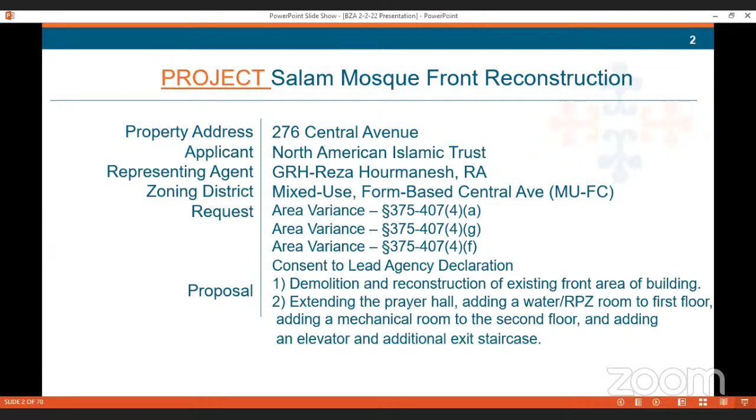This is background on the Masjid As-Salam. It was opened in 2000, serving the community in Albany. We had a renovation or rebuilding done for the backside, which faces Bradford Street — this building runs from Central Avenue all the way to Bradford Street. We reconstructed the back portion of this 276 Central Avenue building, constructed into it, put a new roof on it, and made it 2 floors.

We can have pictures. We can go along and show the pictures of what we have constructed in the end. So these are some of the services we do, community services.

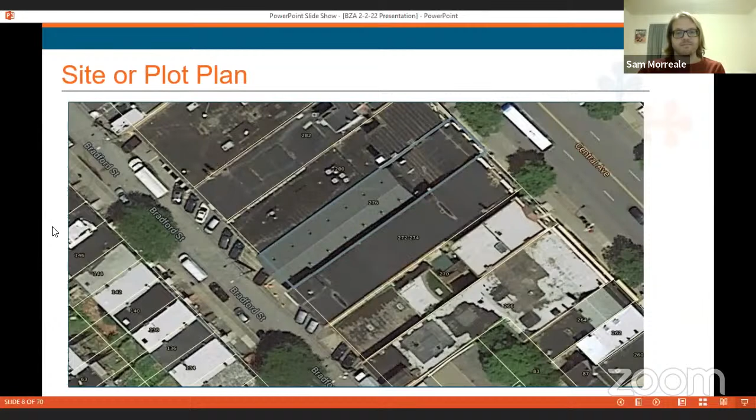Okay, Reza, do you have anything to add to the introduction? No, basically what I heard, it was all good. You said it as I would have.

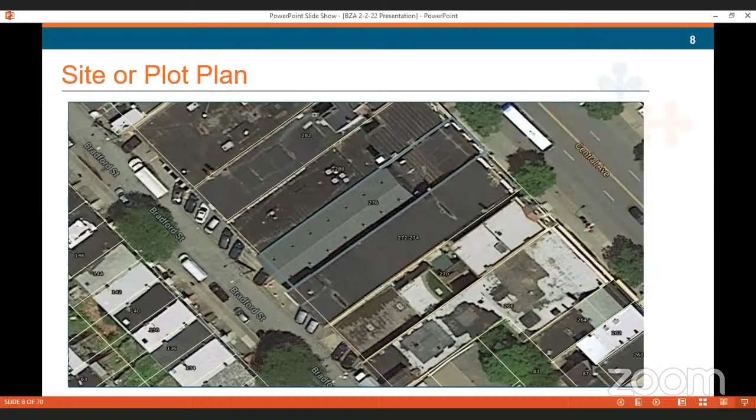Basically, the mosque, they provide services for local people, neighborhood, community, and in addition to that, the old building was pretty much structurally unstable. The floors were all over the place and everything that was not proper. The foundation was not proper.

So what happened that we did the drawing, which is actually 2/3 of the space. It was the back, which was phase 1, which is done. People use it, the community uses it. And now we are here for the front portion, and mainly the issue is with respect to the front elevation,

the fenestration for the front. The design is basically based on the concept, the portal of entry, as like in churches, basically there's a like Gothic church. I'm talking about more traditional bell tower, and this, what we propose is basically very standard for a portal for a mosque.

And also what we did, we tried to work with the planning department. We added windows, we changed the split face block to brick, to basically red brick, to match the church across the street. That's going to be that color of red brick. The tan brick, if you go the other way, you'll see some churches that have some tan stone and brick.

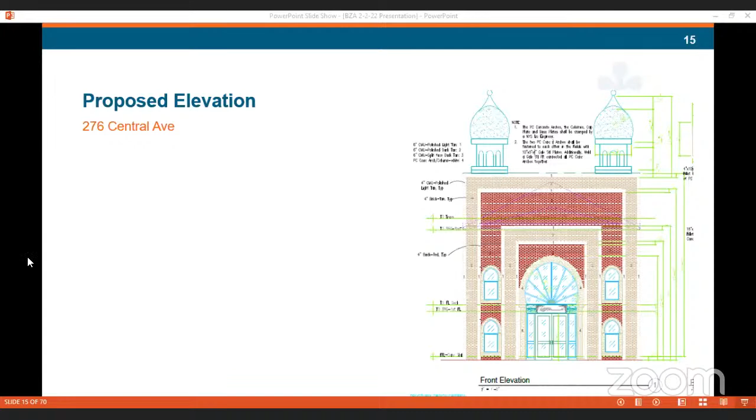So from the variances request point of view, we are trying to repurpose any materials that can be salvaged, and we are working with the Albany Historical Society to use the cornices.

We'll be donating windows, doors to Habitat ReStore. And similarly, alternatives were considered. The existing structure is not feasible to be used by the community.

We want to make sure that there was fire on the second floor where the timbers were burnt, a little bit charred, and we want to make sure that the building we are reconstructing is safe and sound for the community to use.

So if you move on to the next slides. So we're talking about the area substantiality of the variance request.

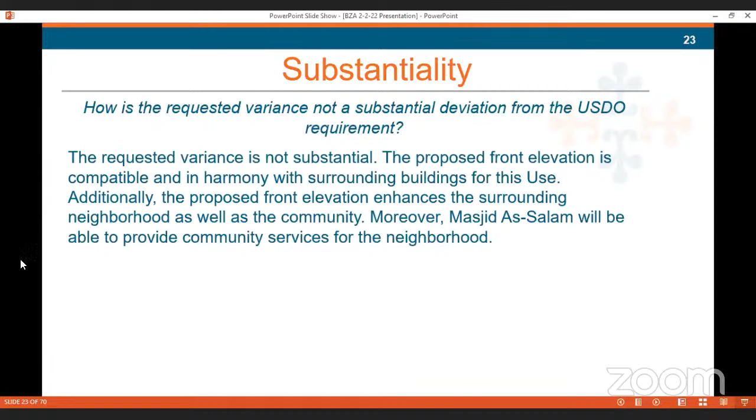So the other variance is for adverse impact, physical or environmental conditions in the neighborhood or district. The proposed reconstruction of Masjid As-Salam's front portion will not have any impact, considering this is already a storefront kind of building. It will not have any impact to the drainage of Central Avenue. This will all be scaffolded and built so there will be no dust or other impact to the surrounding communities. Reza, do you have anything to add?

No, basically we have provided a barrier at the front before they do any demolition. I think they have to get the permit from the city of Albany to work in the right of way, to put that barricade, which is going to go up almost 15 to 16 feet high, to prevent any debris from coming into the right of way, specifically the sidewalk.

That's another thing - that barricade would probably come into the sidewalk about 2 to 3 feet, because there's foundation below that we have to excavate and pour new concrete, and remove the deteriorated old foundation.

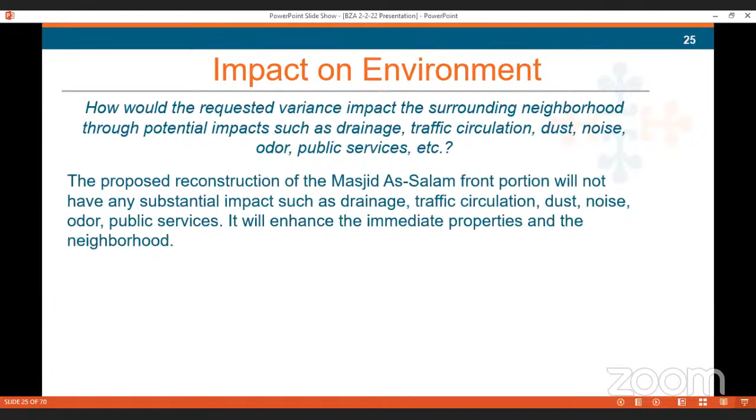So this reconstruction of the front of Masjid As-Salam is not self-created. The existing structure was not safe and adequate for the intended use of what we're trying to do and expand our services in Masjid As-Salam. The foundation is crumbling, and there has been a fire a long time back. We want to make sure it is safe for public use.

Anything to add, brother? Basically, the floor - when you walk on it, it's not even. That indicates there's some wood joist or beam deflecting more than it should. Mainly, when the wood gets 70, 80 years old, they lose their resin and then their elasticity. So the floors on the first and second floor are not even. On the second floor, there are like 1, 2, 3 levels, and I don't know how that happened - they kept building steps to go to the next level. So it's not even accessible for wheelchair access; accessibility is not good. We are providing a new elevator so people can access the second floor, and even the first floor will be fully accessible.

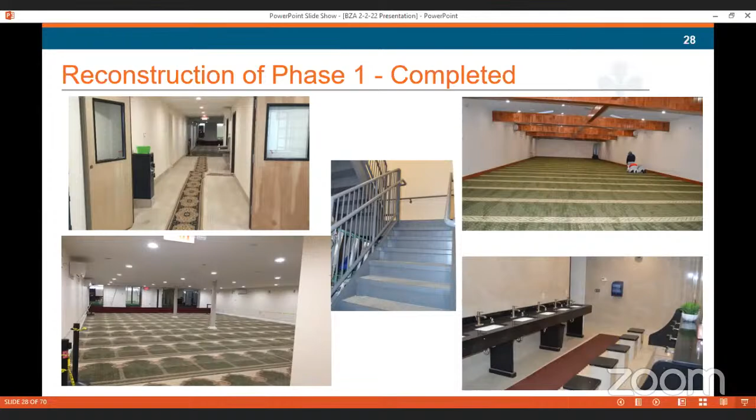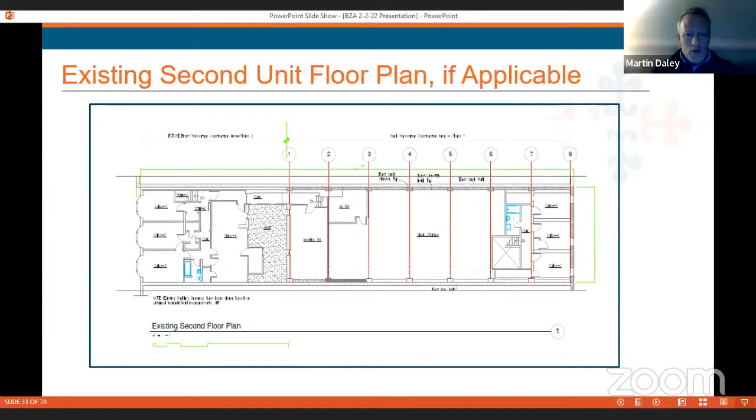Well, I thank you for your time this evening presenting your plan. Quite an ambitious project, so kudos on moving forward on it. I want to go back to our slide listing the variance criteria, because I want to make sure we are narrowing our focus to the areas where we're requesting the variances, which relate to the facade of the building. So thank you. Before I ask questions, I want to give my other board members an opportunity to jump in ahead of me in queue. Do any of my other board members have questions for our applicants?

How old is your current roof? The front, phase 2 or phase 1? Both. Phase 1 is brand new. It's basically a slope-roof gable roof, shingled with ice and water shield. We made sure we went a little bit beyond just putting felt on.

The front is rubber, a portion of it, and a portion is half lap, and it's not in good shape. If you go to the second floor, there's 3 places that are leaking. You can see on the ceiling they put a suspended ceiling to hide the old chipboard ceiling, and you can see some leakage due to discoloration of the ceiling tile.

And that was phase 1? No, phase 1 was basically we put a gable roof on top with a slope roof and shingles. Phase 1 is 2 years old. The phase 2 is the front, and some of it is rubber, some is half lap, and it's not in good shape. There's leakage - at least I've seen 3 places that leak on the second floor.

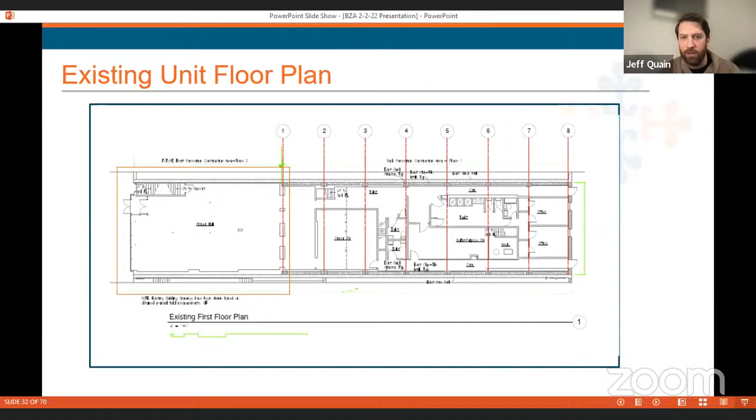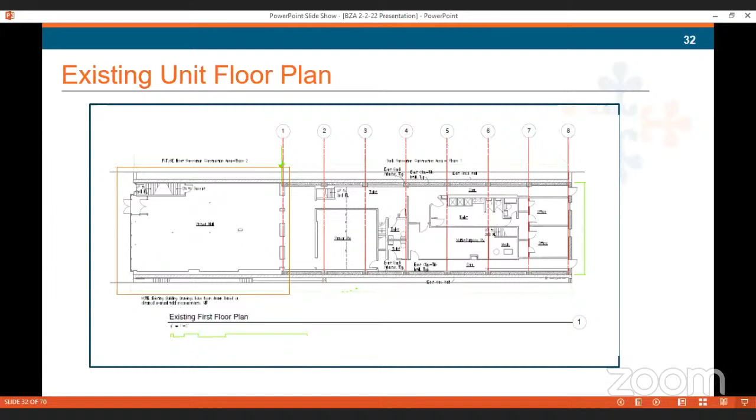It would be a little bit lower than the building to the right, which the mosque owns as well. But it would be lower than that. It would be almost like the adjacent building to the left, or the one that they own. Also there's another place that they own that they utilize for education, but it's about 31 feet something, if you go to the elevation it shows. Now I'm talking about the building itself, not the minarets. There is about maybe 31, 32 feet, if I recall correctly. And of course the roof is lower than the top of the wall, but it would be pretty much 2-story, though it tries to line up as much as possible with the adjacent building, other than the one to the right, which was pretty tall. Now if we would have gone that high, we'd have had to put another story, and we were just trying to keep it to two levels, 2-story.

Okay, thank you for clarifying. And since a couple of the variances we are considering have to do with the reuse of materials, I know you provided quite an extensive plan of how you will donate or reuse. Was there any consideration about reusing these materials in the new building, other than donating them?

To be honest, the new building, like the windows, is not even going to be compatible with what we have. Most of these windows that they have right now on the first floor are storefront and mostly single pane, clear aluminum. But to be honest, not really, because most of the stuff, like the wood we were talking about, if they chip the wood they can use it for gardening things like that, or the windows and things like that could be utilized in a different building. But I don't think it would be prudent to say that we can use some of it in this phase 2 for the new construction. Yeah, and they're single pane windows.

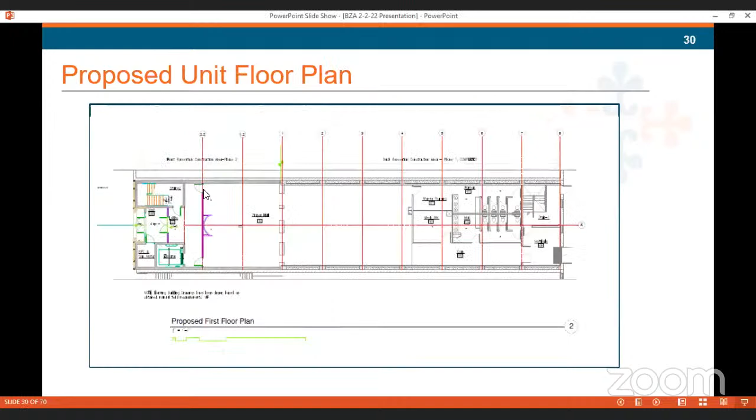So in document 375-407G, the addendum has the heights of the adjacent building, and let me give you the height of the proposed building in total. Thank you.

And that's the top of the minaret, by the way. Top of the building, I think it's about 32 feet from what I recall. Yes, it is 32 feet. The building height is 32 feet and the minaret is 14 feet, so in total it's 46 feet. The church across the street is about 76 feet. No, I'm sorry, it's 60 feet, okay.

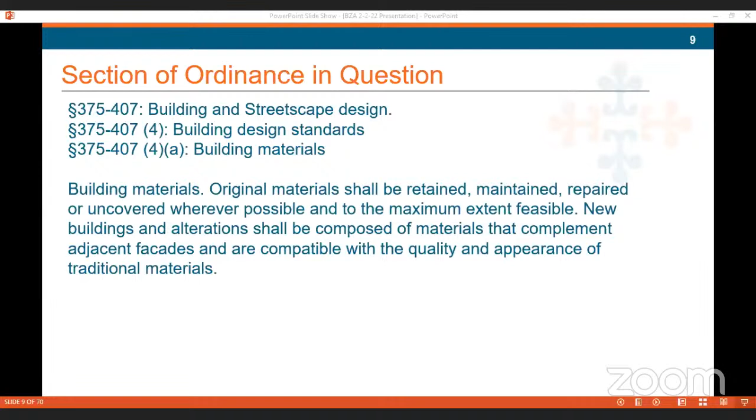Chalking, I call it, basically you can see. So reusing it is pretty different. I would be hesitant to use those because of the loads we have to calculate for the floors. Most probably that floor was not calculated for 100 pounds, which is an assembly space, plus 20 pound, 15 pound dead load, so 120 pounds live load. For an assembly like a mosque, a church, a place of worship, the timbers were not able to make them work with the load that the New York State Building Code requires for assembly space.

Okay, so those materials you're talking about wouldn't be seen in the facade anyway. They would need to be modified, but they wouldn't be visible anyway.

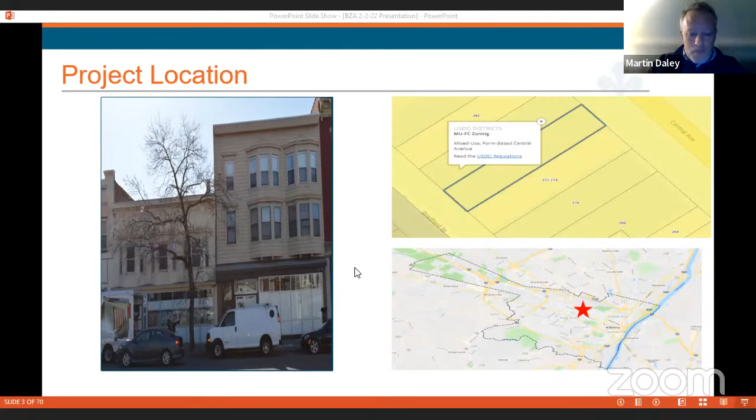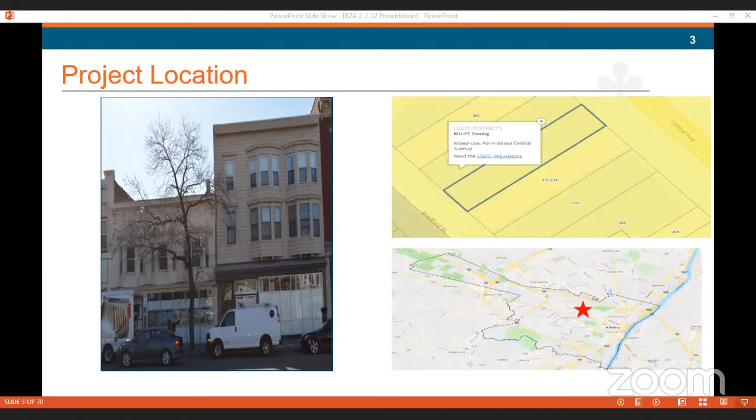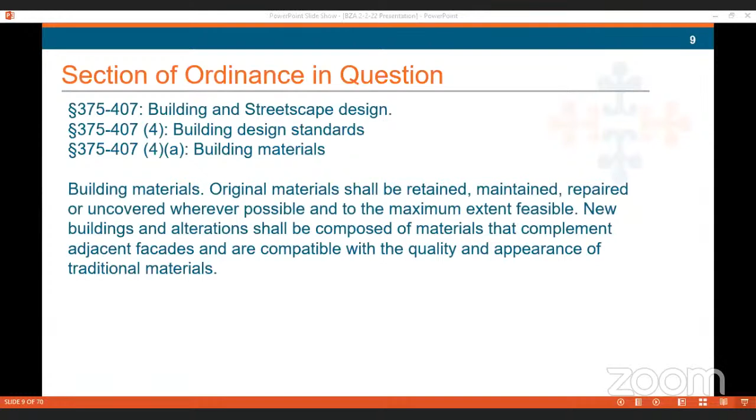Correct. The front of the building is actually brick, but it was painted way back, I don't know when. So we're going back with the same concept. First they had brick, then some community members asked for split face block, and finally we changed it to brick. My suggestion was that brick is more compatible with the other buildings around the area. We also wanted to utilize red brick to match the church, so it doesn't stand alone, and resembles the materials used around that area, left, right, and across the street.

One more question, then I'll go back to my colleagues if they have any additional. When we're talking about fenestration, we're talking about original window and door arrangements. This building seems to have been modified multiple times into various types of structures, most recently a storefront. Is it the applicant's contention that preserving the building as a storefront doesn't meet the needs of the current use of the structure?

Correct. If you look at the storefront, it was added. The original windows were set back, and they brought it out at least 3-4 feet. If you look at the adjacent building, you see that one is set back, so they were gaining more space. And of course those storefronts are painted white so they can get some privacy when they pray.

Basically, a lot of the stuff on the first floor, that storefront, was remodeled maybe 10 or 20 years ago, so none of that was going to be useful to us in terms of showing that this is a mosque. It resembles very much a storefront for a retail store rather than a religious building.

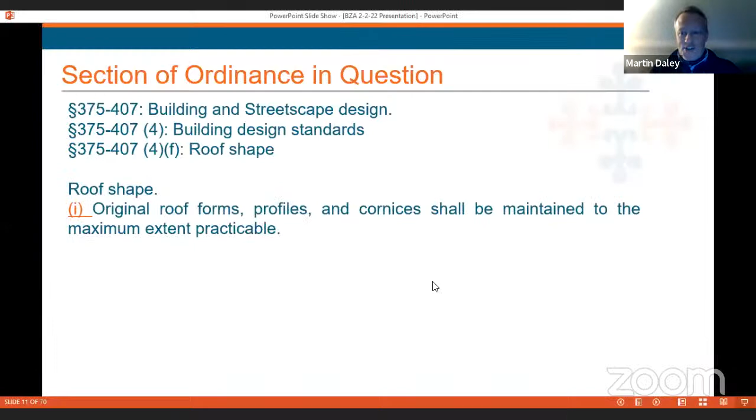Thank you very much for your comment. At this point in time, the applicant typically rebuts any public comment, although with two comments in your favor, it would be unusual to rebut them. But if there's anything additional the applicant would like to submit for the record, it's an opportunity to do that.

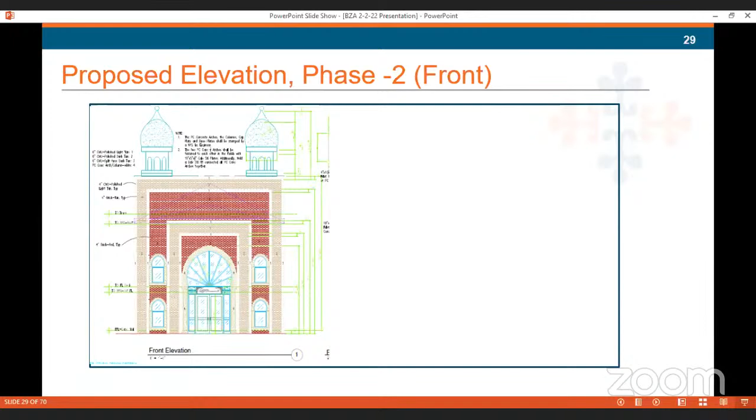From our side, we are shovel ready with this project at this time. We are just waiting on the approval of the area variances from the planning board. We did a fundraiser, and from a logistics point of view, we are hoping that the planning board and the zoning board will approve this request.

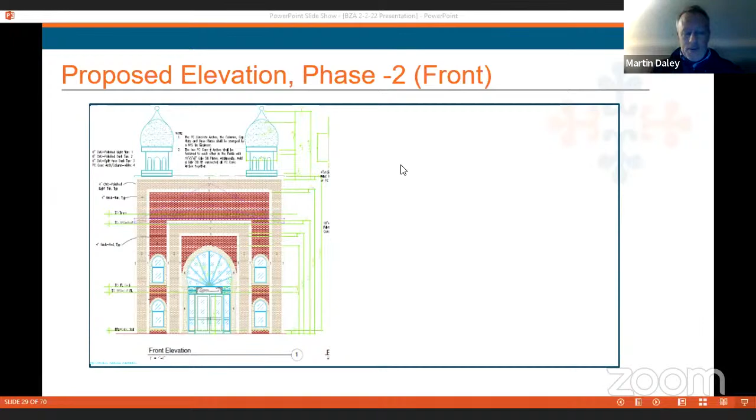Okay, so our next portion of the public hearing is in relation to druthers. There are 3 area variances being sought for this particular project. We have had prior workshop and public hearing opportunities for this project, so unless there are any objections, I don't think there's a necessity to go through the entire project again. We do have the applicant here if they would like to provide any additional commentary, or if there have been additional items that need to be brought to the board's attention. I do want to provide them with that opportunity, considering it is a public hearing, and then we can open it up for additional public comment on this particular project.

Great, thank you for the opportunity to appear once again before the board. I think this is the 3rd time for this presentation, so I am set from a fact standpoint. I think the presentation's been thorough, we've heard quite a bit of rebuttal to mine, and I've answered. So I am okay resting where I am. And if at the end of this, if there's public comment against, if I could be given the opportunity just to respond, that would be great.

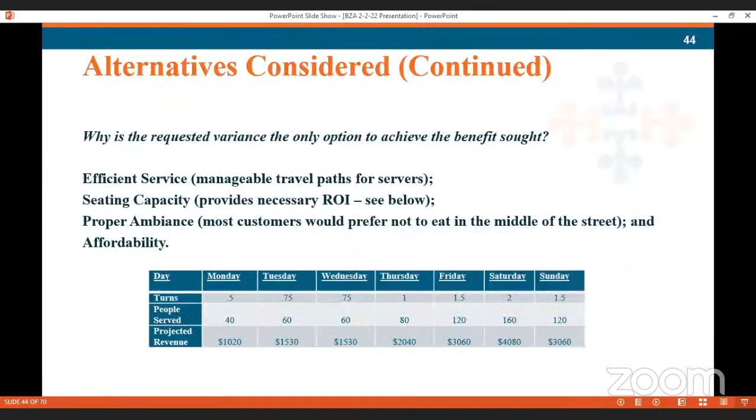Always love brevity, thank you very much. Do we have any questions from our board members in relation to the project? Anything that we might not have been able to bring up before? Do we have anyone signed up for public comment for this particular project? If anyone would like to speak, please raise your hand.